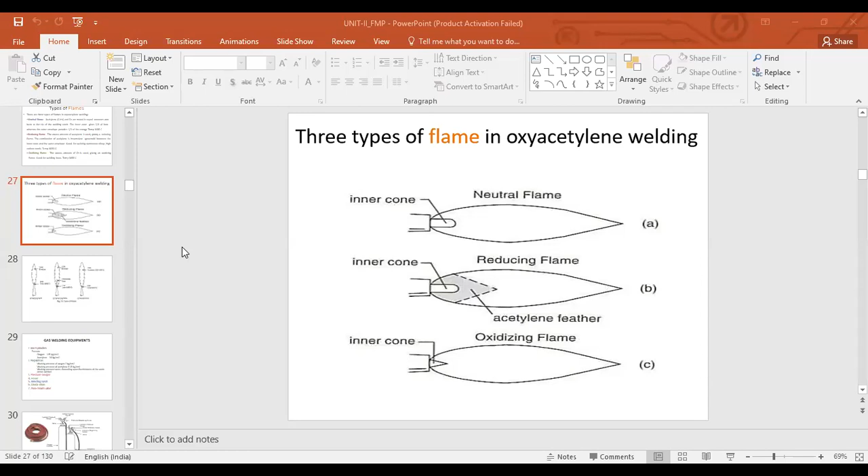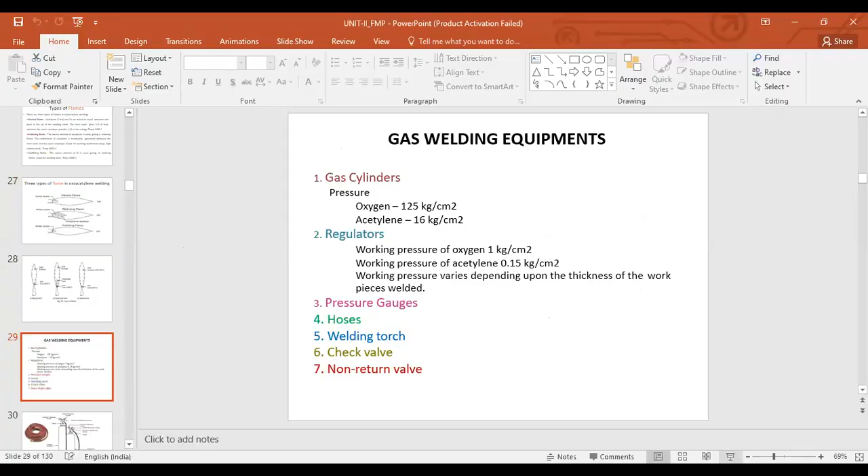So in the last class we ended here, right? Yes, we saw the different types of flames, right? And now we're going to look at the gas welding equipment. Okay, so you have the gas cylinders, right? Those are the important critical elements: oxygen and acetylene, right?

And the pressures that are given, as we have kept units as kgs and centimeter squares. So when we're following those units, this is what the pressures would be in those gas cylinders. And the regulators: working pressure of oxygen 1 kg per centimeter square, acetylene 0.15. Working pressure varies depending upon the thickness of the workpieces welded.

So if the thickness is high and the material is hard, or the temperature required to melt it is high, then the working pressure would vary, of course, right? That's common sense. That's what is being highlighted, depending on the thickness of the workpiece. Pressure gauges, right? Those are there for us to know how much pressure we want to keep for particular applications. Hoses, for connecting the gas cylinders to the torch.

Welding torch, of course, and check valve, non-return valve, so that it doesn't return, as the name suggests. It's only a one-way valve for the mixture of gases. Let me explain it here. If you don't have the non-return valve, the mixture which is formed here because of the combination of two gases, one coming from the oxygen cylinder, one coming from the acetylene cylinder, you have a mixture forming here.

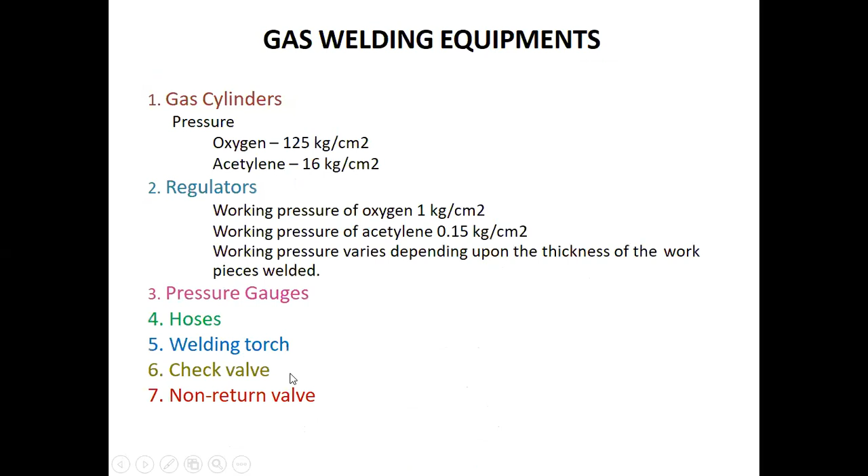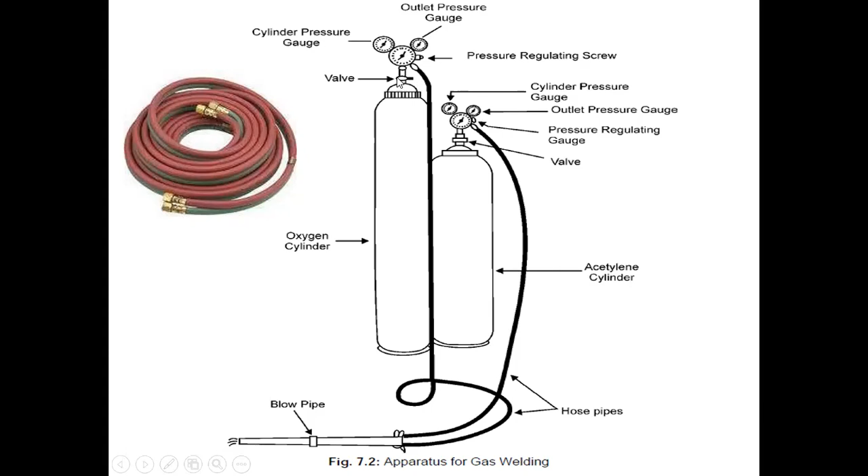So how do you control that? You control that with this valve here. One valve for the fuel gas, which is acetylene in our case, and to control the oxygen, we have the other valve. So the proportion can be varied with these valves. These are very important in controlling the temperature, and therefore the flame that we get, right?

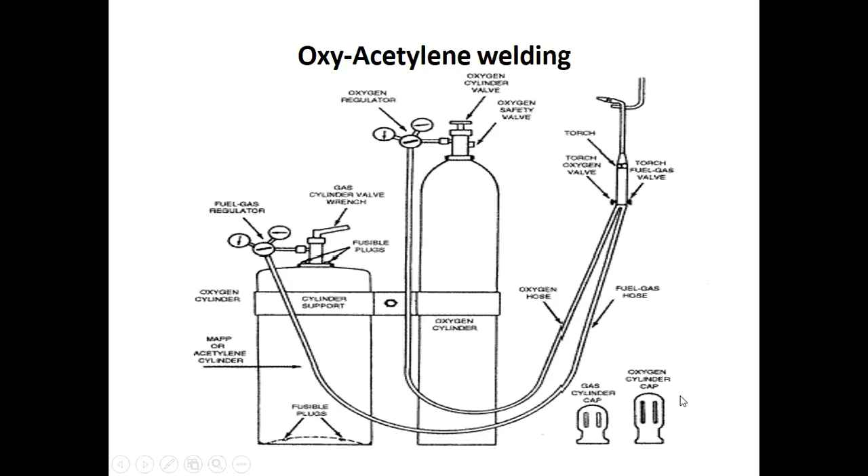You see here, as I said, oxygen, acetylene, denoted with that color, and not just the color. I even mentioned the thread design. Even an ignorant person, one who does not know which pipe belongs to which cylinder, will not be able to connect it except correctly, because of the left and right hand threading, as I had mentioned. This is very important because otherwise it would lead to a lot of unsafe situations, right?

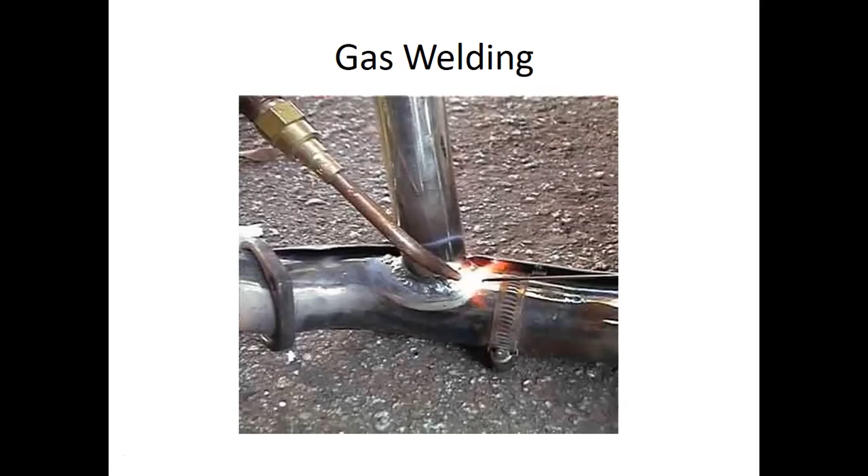Is that clear so far? Gas welding? Because I think that's the end, yes, that's the end slide for gas welding. If there are any doubts, you can ask.

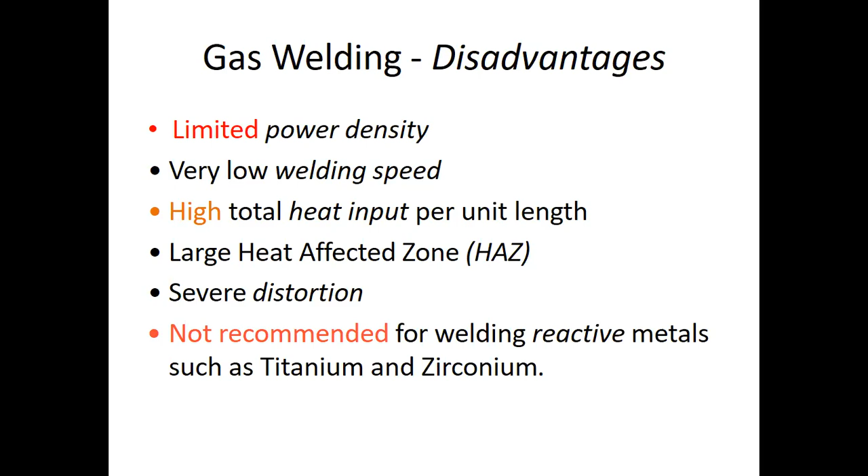Okay. So you see the next topic is arc welding, or technically electric arc welding. You might have seen this on the roadside, just as gas welding. This is also very common. So technically it's electric arc welding, but generally it's called arc welding. So it's the same thing. Okay, that's the first thing to note.

You see, to start with, we know many things around us are welded, right? That's the common point. What applications, right? Just to give you an understanding of this process, we'll first look at where and why this process is to be used. Pipelines, we know, right, that bring fresh water to us. These are to be joined, right? Because we cannot make them too long. There has to be a certain length where we have to cut the pipe, right, for ease of transportation.

So when you are trying to have those continuous pipelines, we have to weld it, right? As in towers that carry electricity to houses, even those big towers are also to be welded, and cars and buses that take people where they need to go. As I told you, BIW, body in white, the external shape of that car, sheet metal, is also to be welded, right? So arc welding continues to be used extensively in the construction of steel structures, right?

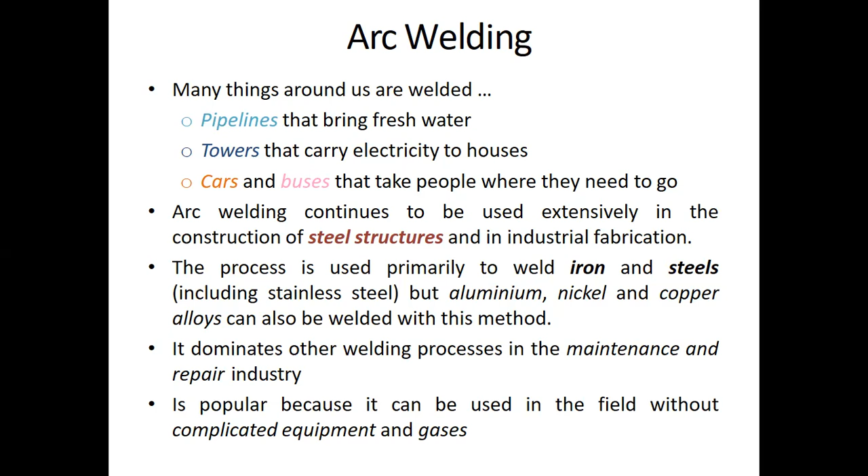It dominates other welding processes in the maintenance and repair industry, right? It's popular because it can be used in the field without complicated equipment and gases, as we had in the last one, gas welding, right? So gases are not involved here. That's the major difference. And there is not much complicated equipment here.

To define it in simple words, the welding in which the electric arc is produced to give heat for the purpose of joining two surfaces is called electric arc welding, or generally arc welding. So that electric arc is what is important, which makes it arc welding. That arc will produce the heat. That heat will melt those two surfaces which are to be joined, and therefore it will join. That's called electric arc welding, or generally arc welding, right?

Joining is by fusing of two or more pieces of metal together by using the heat produced in an electric arc, right? Fusing is what is being highlighted here. We're trying to fuse the metals. Fusion is happening because of heat generation. The arc is like a flame of intense heat that is generated as the electrical current passes through a highly resistant air gap.

Okay, so that arc is like a flame of intense heat that is generated as the electrical current passes through a highly resistant air gap. That's the principle. We are going to see a slide on the principle of arc generation also.

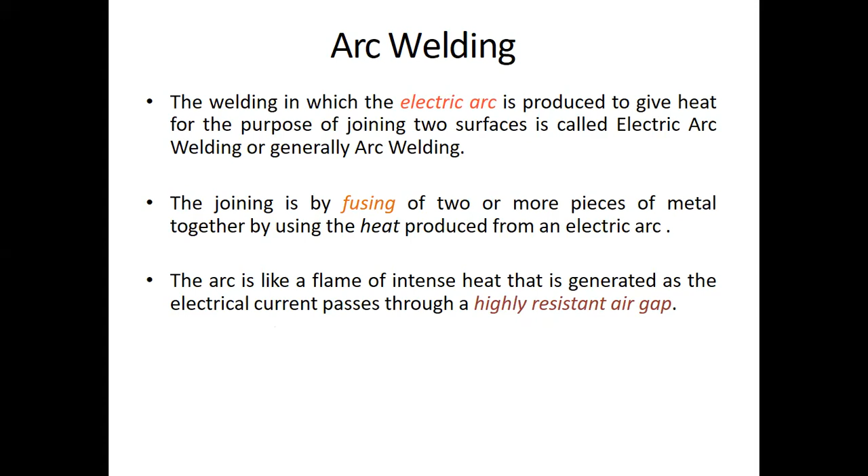So you see, a manual arc welding process. Manual in the sense where a human is required. Humans are used for this arc welding. There are even robots also, but traditionally this has been a manual arc welding process. Right now it is being automated.

But it has been a manual arc welding process that uses a consumable electrode coated in flux to lay the weld. Consumable electrode is highlighted because the electrode we are using will be consumed by the weld. There are other welding types wherein you are using a non-consumable electrode, so the electrode will not be used up.

The electrode is only responsible for heating up the two components to be welded, and therefore the joint would take place. You might have a filler material supplying additional metal, but the electrode will not be consumable in those other categories. For example, GTAW, gas tungsten arc welding, uses a non-consumable electrode.

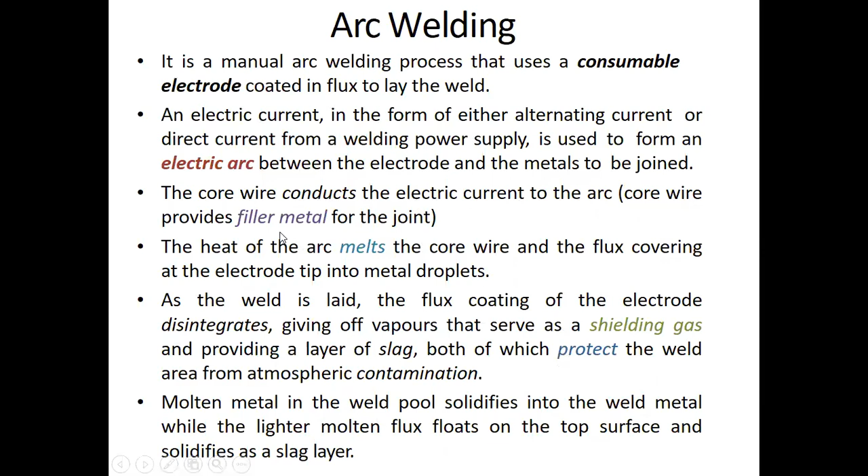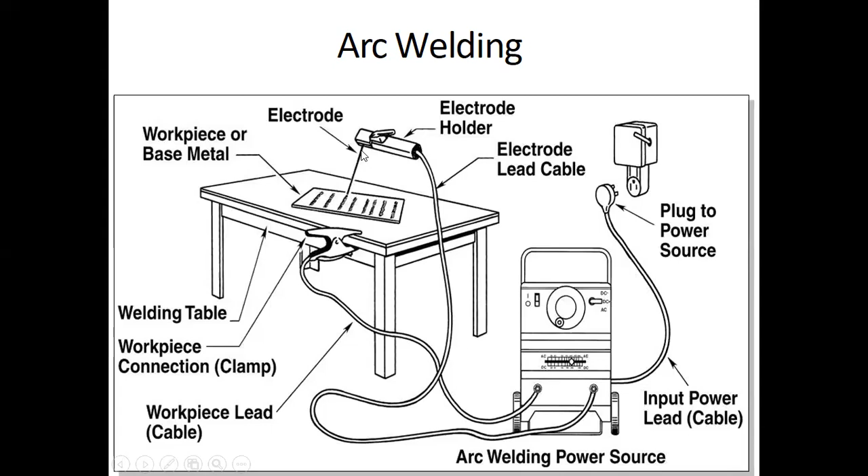So you see that core wire. This electrode will have a core wire, and I said the electrode will have coating also. So on the core wire, you have coating. The core is the filler metal; it is completely metal. And on top of that, you have